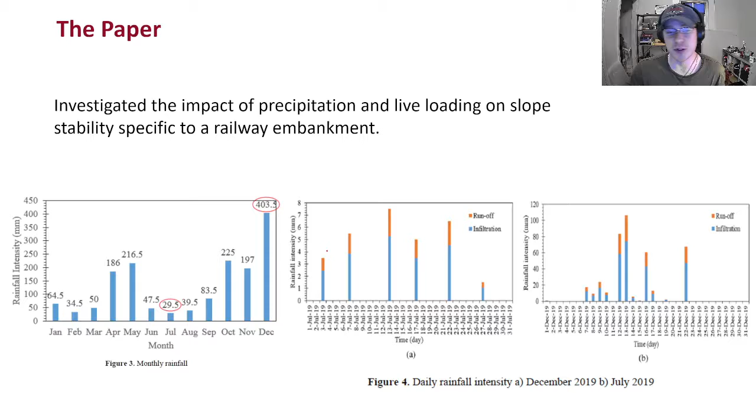So for this, they took a look at the literature, and they saw numbers such as Ng et al., which you'll see later referenced, considered a 60% infiltration to 40% runoff, while Rahardjo et al. suggested an infiltration value anywhere between 40 and 70%. So for an undisclosed reason, this paper chose to use a 70% infiltration rate, which is pictured in these graphs A and B, where you can see they've segmented it into the 30% runoff, 70% infiltration.

So special care was given to embankment design and embankment geometry. In reality, the majority of embankment failures are actually a result of design error per Gu and Tan 2006, as referenced in the paper. The researchers wanted to ensure the use of idealized embankment geometry so as not to contribute to an inaccurate numerical analysis.

The workflow on the right is a little bit of a flow chart that shows how they worked through the problem in a numerical methods sense. So they start off with a transient water flow analysis in SEEP/W, then they apply the results of their transient flow analysis to SLOPE/W, and then they have the two cases which diverge at slope stability analysis using a limit equilibrium method, Morgenstern-Price, I believe, and they go on for the unloaded condition and the loaded condition, and then join together at the end for the sake of comparison.

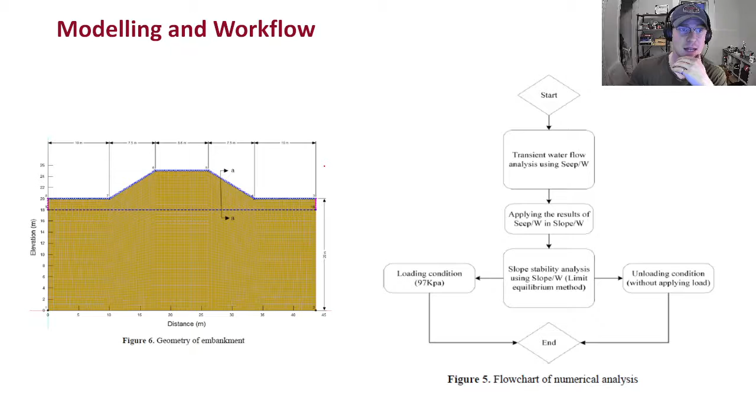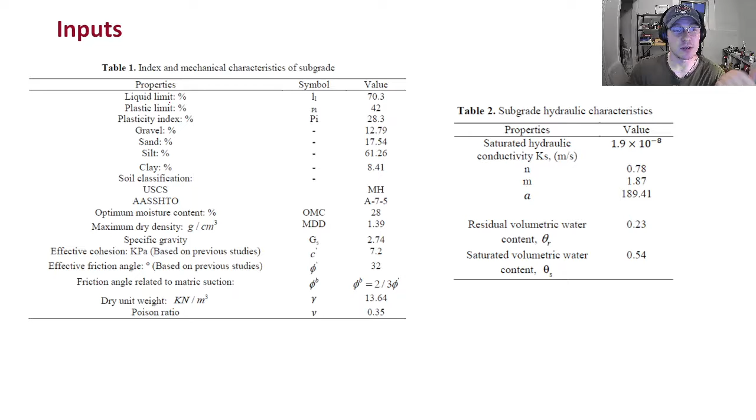So here are some of the inputs. First of all, these two tables were perfect. They're a great reference. They include the mechanical characteristics of the subgrade, which were obtained from the laboratory testing. You get your liquid limit, plastic limit, gravel percent, silt, on and on.

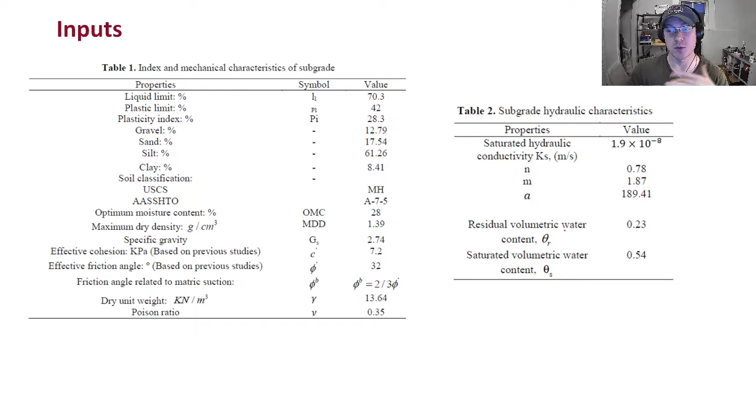And as well, they provided the hydraulic characteristics: the saturated hydraulic conductivity, the n value, the m value, residual volumetric water content, and saturated VWC, which we are all familiar with from some of our work in Excel and past tutorials. And they published with it these results.

So these first figures kind of show, on the left, we have the case of loading through July, accounting for both rainfall and accounting for vehicle load.

So it kind of demonstrates how the factor of safety decreases continually between rainfall events as we have this rainfall infiltration, and we don't necessarily have the time for all that water to seep back out and settle at a kind of stasis. And so due to decreased shear strength, positive excess pore pressure, or decreasing matric suction, this is all contributing towards this lowering factor of safety.

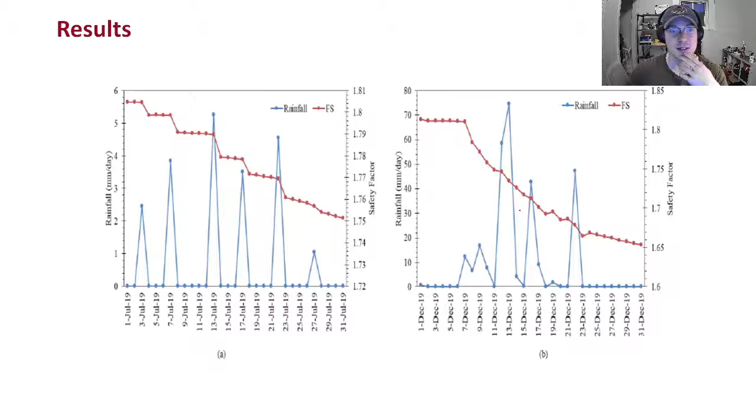So the leftmost figure shows the influence of applied load, sorry, and the rightmost shows just with the rain considered. So let me just get these up. Perfect. So here you can see the first figure demonstrates factor of safety from the rainfall events and loading and the decreased shear strength, but here we actually have their end results.

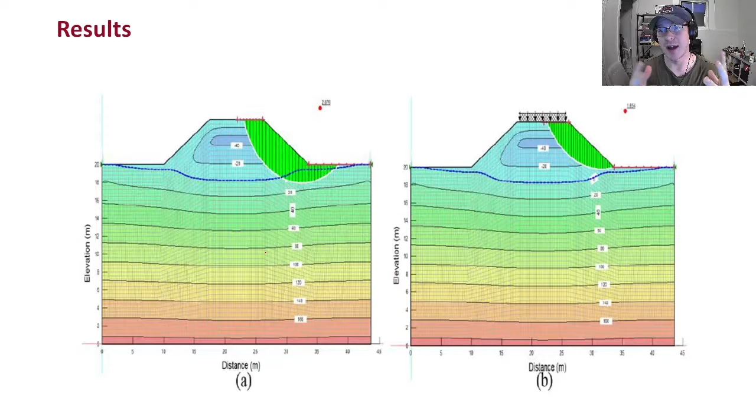These are their worst case scenario failure surfaces for both the loaded and unloaded condition, as well as the factor of safety. I apologize for the graininess of these figures, but these were also how they were presented in the conference paper, so I did my best to zoom in. So for the unloaded condition, they were able to get a factor of safety of 2.876, which might seem okay, even though we aim for that 3-round.

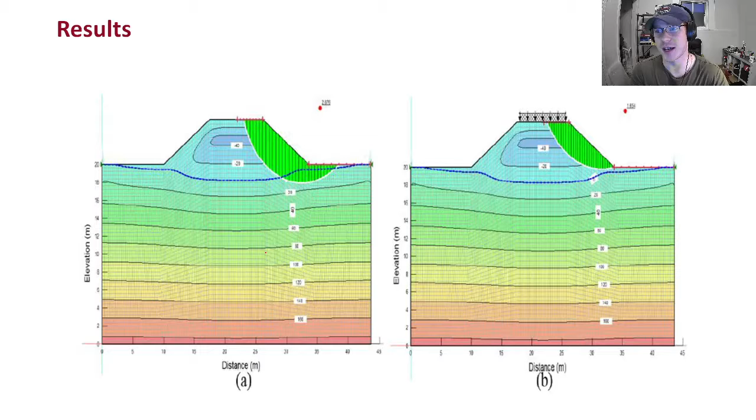But in the loaded condition, you see that with all the rainfall, you get pretty close to a failure point with a factor of 1.654, which doesn't leave a lot of wiggle room.

So, proposed course of action. The paper does a great job of illustrating the impacts of pore water infiltration in combination with loading on factor of safety and embankment performance overall, and it serves as a great opportunity to build upon and for further exploration into the topic. So for my term project, I would like to recreate the table outputs in order to validate and ensure that my model is accurate.

I'd like to undertake 2 or more of the following. I've chosen 3 ambitiously, and if all 3 work out, that'd be excellent, but I want to give myself some room for some error. So first of all, I'd like to explore a scenario with a train exceeding load limitations. So certainly there are cases where load limitations are skirted in order to cut costs or what have you, and it's not always in the best interest of safety. So I'd like to take a look at a realistically overloaded train, so take a dive into the literature and see what kind of percent overload people actually get away with, if they do. And if not, I'd just like to play around with that and really see how bad it can get.

Second of all, I'd like to explore a scenario with extreme rainfall, whether that be a 1 in 50-year storm, or a series of days back to back to back with extreme precipitation, and just see what a one-off storm event could really do to the factor of safety, because as you see in the real climate data, sometimes it's spaced apart days between these big events, but what if we got hit with something really bad, perhaps not all that common, but something really bad.

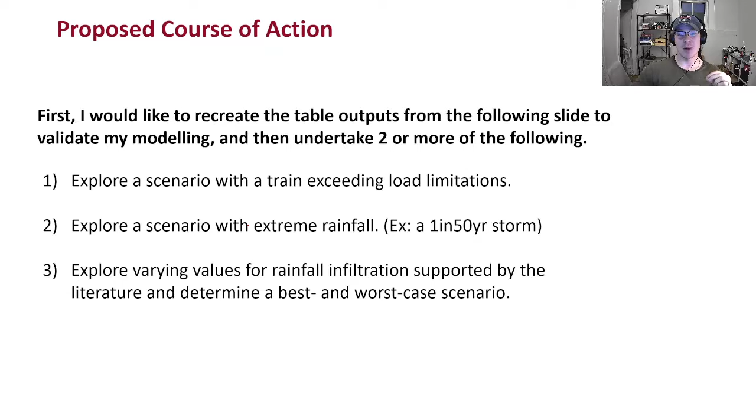And third, I'd like to explore varying values for rainfall infiltration. So if you remember on the second slide, they took a look at rainfall infiltration values and referenced a series of competing thought processes from the literature before choosing 70-30. So I'd like to kind of play around with that and take a look at the conservative end as well as the less conservative end, and kind of see how that interplays with our factor of safety, and ideally come up with a best and worst case scenario for a more informed image.